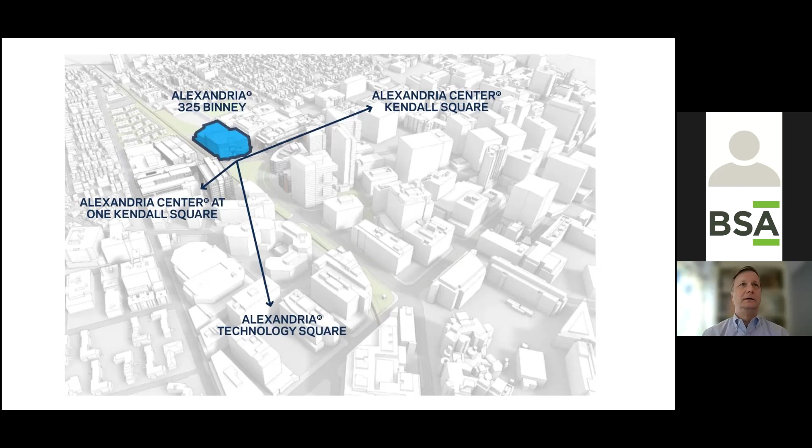One thing we're cognizant of is that our tenants are very demanding - not only do they need high-tech space to perform their research, but they like amenities as well, since they have to compete for their employees. So having a nice structure that functions well is important, as well as being sustainable. We're seeing that sustainability is not just an afterthought anymore - they come in looking for a sustainable building. Everybody wants to make sure they do their part to help with this crisis we're in now.

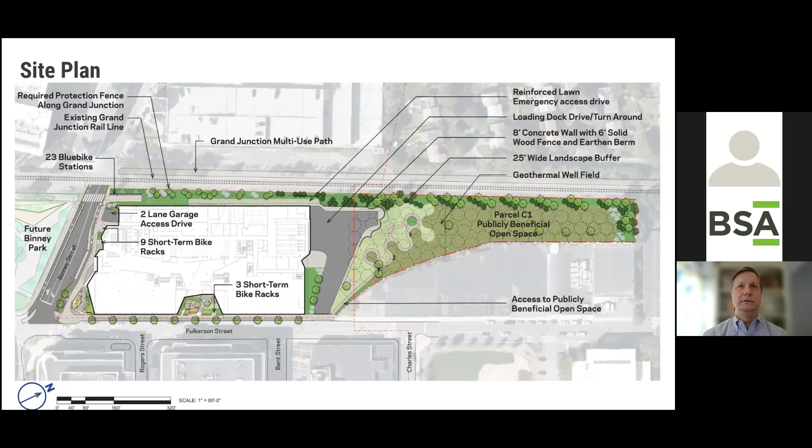So we'll go ahead. Cathy, I'll let you take over from here. Thank you, Rick. Well, as many on this call would agree, an excellent project starts with an excellent client, and Rick and the Alexandria client certainly are that. We enjoy very much working with them on this. They're a challenging client - challenging in a good way - and they challenged us as a design team to do a number of things on this project.

A few things Rick's touched on already. So, we designed a building that would act as a linchpin to the Alexandria buildings in Kendall Square, as Rick had touched on.

Create a building that was a good neighbor to its East Cambridge surrounds and that respected and enhanced its Kendall Square context. Create an efficient floor plan, flexible both lab and office, that took advantage of the density and FAR allowed on the site. Also creating a building that promoted and supported healthy environments, including access to natural light.

And also, certainly not the last challenge, but a big challenge and something that is important, I think, to everyone on the team, is to create one of the most sustainable lab buildings to date.

So one of the main aspects as architects, as we start looking at this, is the building design that supports creating the most sustainable building that we can create is a high performance envelope. So first of all, you'll see the building is not a glass building.

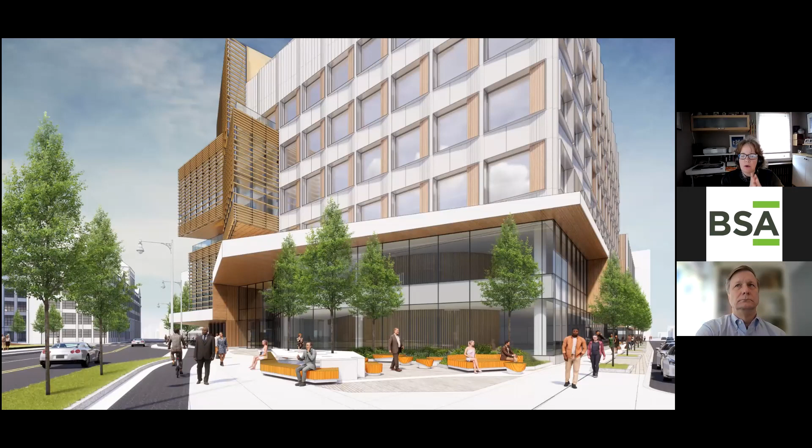We have 6 inches of mineral insulation, and our R value for the opaque wall is R22. I have a lot more metrics, I won't get into it, but we can, if you have questions, I'll answer. The windows are triple glazed, and working with the natural light, they're close to floor to ceiling in height.

Some other metrics, just quickly: 6 stories with an entirely closed penthouse. All the mechanical equipment is within the building. Floor to floor ceiling heights from 14.6 to 16.6. We have 2 levels of garage underneath.

And the floor plate, given the maxing out of the FAR, as you'll see here, we've inserted an atrium, and that helps work in bringing the natural daylight deeper into the floor plate. It also works, as Rick had said, to provide an amenity - not only daylight, but spaces for informal gathering, social gathering, as well as more formal gathering.

Next slide, Jack. So just quickly, our facade overall is just under 35% glazing. And as I said before, it's made up of primarily punched openings. There's the TAKTL panels, as well as metal panels that surround the accent and surround the windows.

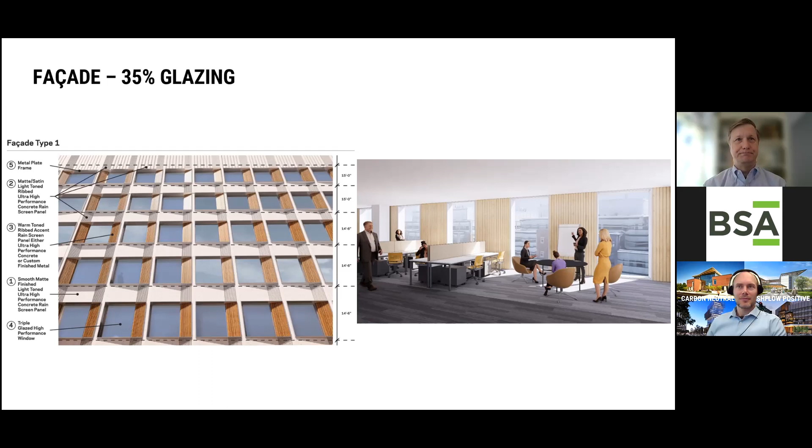So as we approach all our buildings now, it's sort of a 3-step approach: how do we get to carbon neutral and net zero, however you want to frame it. Energy efficiency is the first, obviously. The lower you can get the building's BTU requirements, that gets you off to a great start.

And also, as you'll see later, we're striving to minimize fossil fuel. It would have been great to eliminate it, but because it's a lab building, because we have such high ventilation requirements, we're just not there yet. But this building will use about as little as it possibly can for such a use.

And then when the project's complete, we'll have some solar panels on the roof, and then we will be purchasing offsite renewable energy to offset the remaining power to get us to net zero.

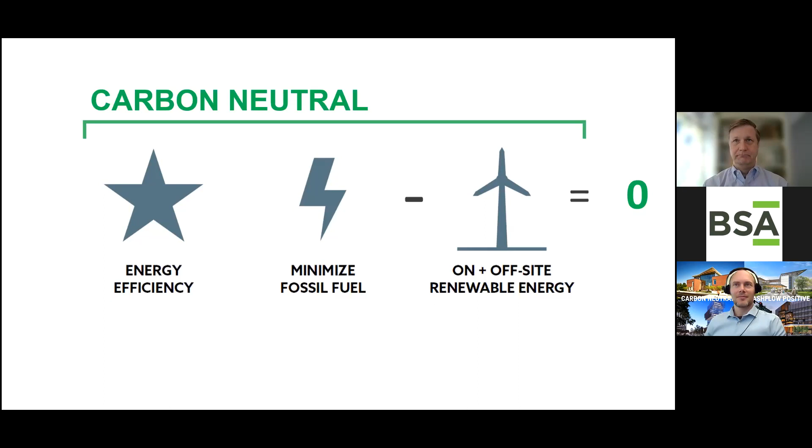So thanks, Rick. We wanted to give a little context here just for the whole audience to think about what's happening in a broader realm beyond the project, and part of why we're all headed in this direction.

So one, obviously the reason ultimately is climate change, but there's also regulatory requirements coming into effect across the country in different states. And Massachusetts now, with the new climate bill that just passed, is going to be one of the leaders in defining a net zero energy code.

Likely by late 2022, the DOER will be promulgating a municipal opt-in net zero stretch code that towns can then opt into and adopt as their net zero standard.

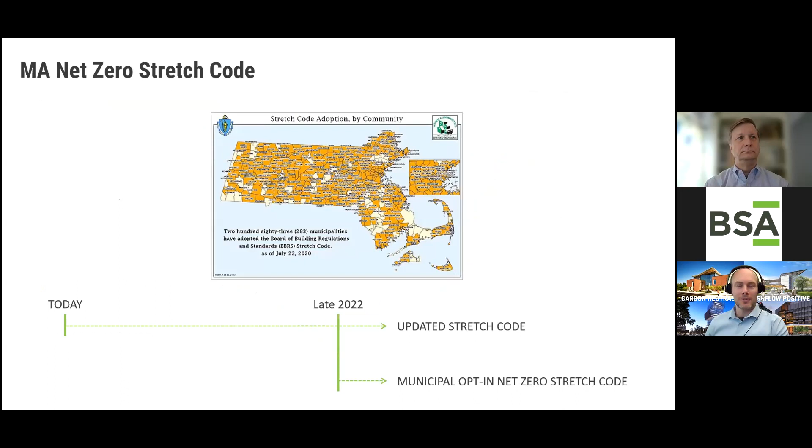In addition to the net zero code, there's also carbon neutral zoning going into effect in different cities and towns. Somerville has already passed theirs, with overlay districts and density bonuses where many buildings being built there must meet fossil fuel free carbon neutral standards. Lab buildings in Somerville get a pass on that to some degree, but still have to meet LEED Platinum.

In Boston, we're working on carbon neutral zoning for the city, which will define limits for building emissions and then mandate that remaining energy consumption be offset, similar to what Rick described, to get to carbon neutral for all new buildings starting in the near future. Cambridge, as Rick mentioned, he's working on as part of their advisory group to help guide them towards carbon neutral standards. And a shout out to Brookline and other towns that have been pioneering a move towards mandating electrification.

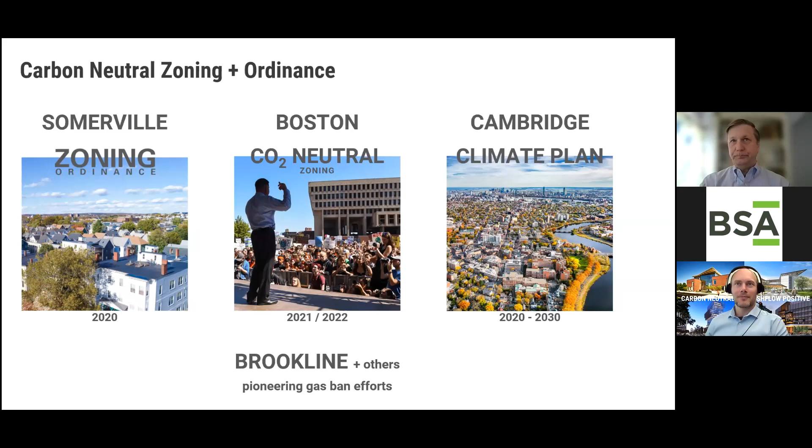In addition to new construction, there's also a move towards regulating existing buildings. Similar to how a new car has to meet a miles per gallon standard, but old cars still have to get inspected and tuned up so they're not polluting too much, same thing with buildings. Looking at the existing building stock, there are many places across the country now requiring not just reporting on energy data, but also a move towards energy reduction.

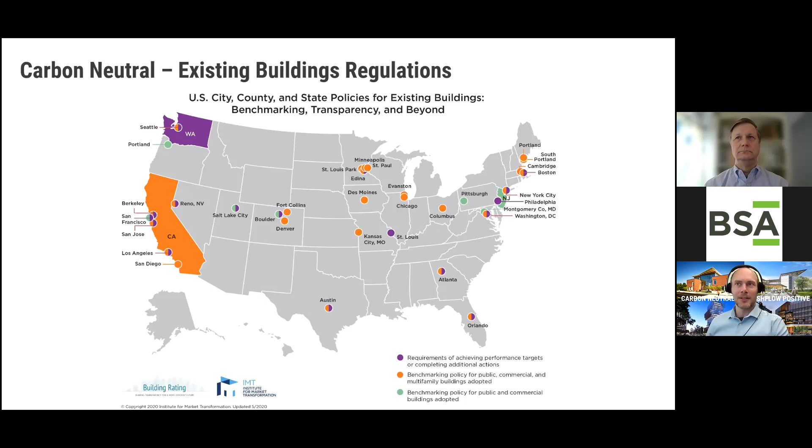New York City was one of the pioneers with Local Law 97, moving towards an 80% reduction in building emissions citywide by 2050. Boston is now following in their footsteps with 100% carbon reduction by 2050, ratcheting down in 5-year increments. In both locations there will be financial impacts and compliance payments to the city if you're not in compliance. So this is a smart investment in the future to be building low carbon buildings, even labs and healthcare, because at some point there will be a financial impact if you're not aligned with those carbon reduction goals. If you build it right today, you'll be smooth sailing in the future.

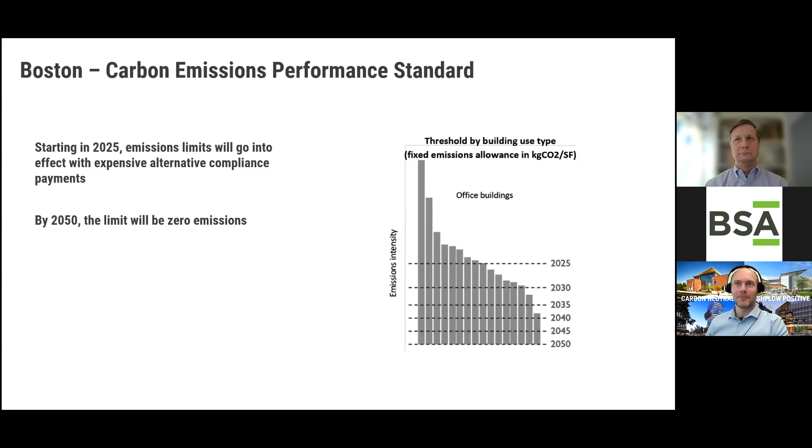Now, why does everybody keep talking about electrification? Sometimes people worry that tying to the grid and running an electric building has a lot of emissions too. And it's true, the electric grid is not carbon neutral yet unless you buy renewable energy to offset your electricity consumption. But if you just plug into the grid, if you plug in a heat pump that's say 300% efficient, you're actually having half as much emissions as if you burned natural gas to heat your building. And that's already based on 2018 data, and emissions for the grid keep coming down.

Not only is a heat pump far lower emissions today than burning fossil fuels, in the future it'll become dramatically lower. The climate bill is another big driver of that—by law we now have to be at 40% renewables on the grid by 2030. And then there's also nuclear. So the grid is not only clean now, but getting cleaner very quickly, which makes it sensible to pursue electrification for buildings rather than burning fossil fuel.

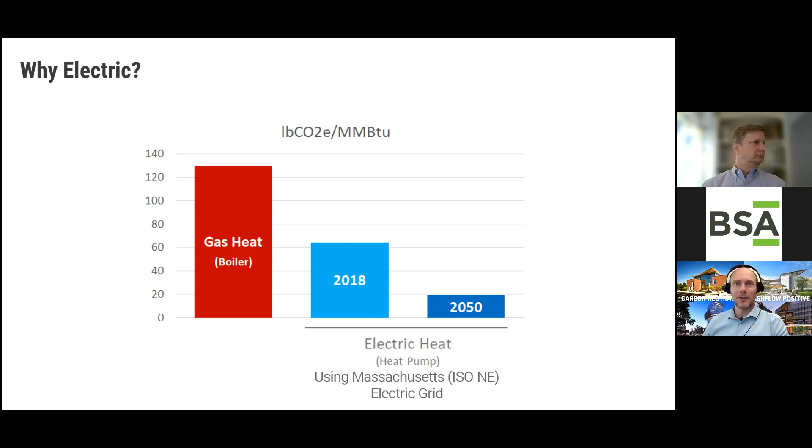As Rick mentioned, labs today are not quite ready in a cold climate like Boston to be 100% electric. You need backup power, peaking heat, and backup heat. All of the net zero and carbon neutral standards we've looked at, whether codes or zoning, recognize this and allow fossil fuel combustion as backup and peaking systems like generators and boilers, particularly for lab buildings—just an absolute necessity.

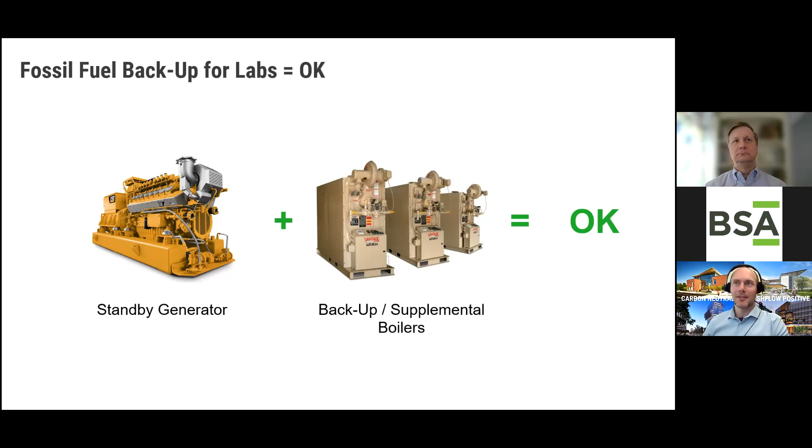As Rick mentioned, we also have geothermal ground source heating and cooling to reduce energy demand, and water reduction measures—three things we're doing there. We have a blue roof system that captures rainwater, condensate capture, and we're also capturing the underslab groundwater, using all of that for both irrigation and cooling tower makeup to reduce overall water use.

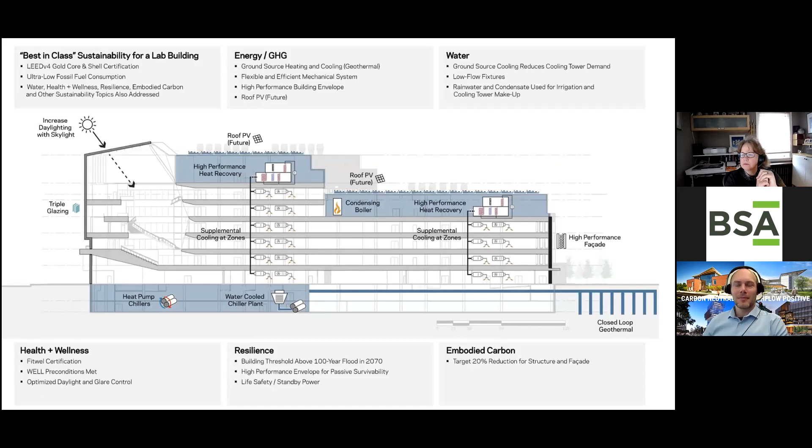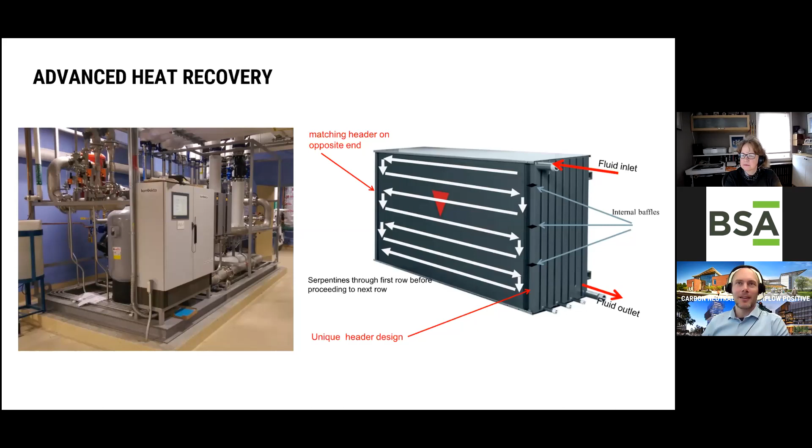So here's the thing that gets me most excited about this project. A lot of you who've worked on labs are probably familiar with the advanced runaround heat recovery system for capturing energy out of the exhaust air and putting it back into the supply air. That's nothing new, many buildings use this technology, but what's really cool is we're taking it to the next level.

Normally, as you can see in this diagram, we have the exhaust air handler exhausting all the air out of the building, and on the bottom the makeup air handler supplying air back into the building, bringing in 100% fresh air. A typical glycol runaround system has one coil in the exhaust and one coil in the supply, circulating water back and forth to transfer the heat energy.

One of the things we're doing to make that more efficient is adding a second coil in the supply air handler that not only provides more surface area for better heat transfer, but also wraps around the cooling coil, which you can see in the center here. So you get free reheat and additional pre-cooling off of that in the summertime.

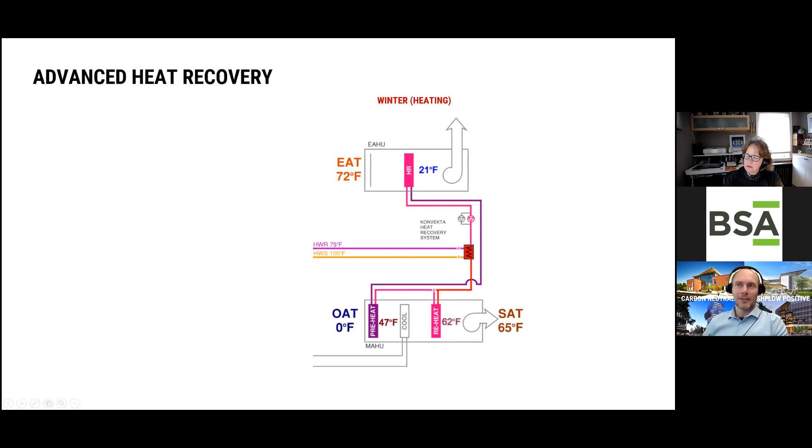But that's just step one. Step two, and this may seem shocking to some, is we are actively going to frost the coil in the exhaust air handler on the coldest days of winter. So not only will we pull out every BTU down to freezing point and stay above freezing, which is what normal exhaust systems do, we're going to actually drop below freezing, allow humidity to condense onto that coil, build up a small layer of frost, grab all those extra BTUs out of the exhaust air, and circulate that heat back into the supply unit.

This is one of the few systems in the world doing this. I'm sure there'll be many more in the near future - we're working on a few now, actually. But this is really one of the first in the US doing this. There are a few in Europe, I think about 12 or 15 at this point.

There's a really critical way of monitoring to make sure you don't build up too much frost, because you could trip the exhaust units on high static. So there's a timing where the coils frost and defrost in a series to maintain a very minimal pressure drop impact and not let the coils fully frost up.

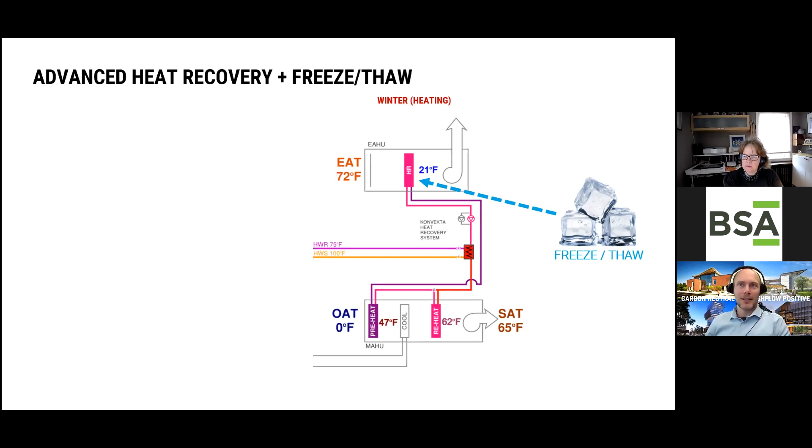That unlocks the potential to use that exhaust as a source of heat beyond what a glycol loop can do, by tying in a heat pump chiller. We're turning that exhaust coil and tying a heat pump chiller to it to essentially make it an air source heat pump. People are probably familiar with mini splits on houses that in wintertime pull heat out of the air from outside and put it into the house to heat it electrically, very efficiently.

Well, this is the 500-pound gorilla lab version of that. As the exhaust air is leaving the building, we're not only going to pull heat down as much as we can passively, but we're going to actively use the heat pump to super cool the fluid going into that coil, pull every last BTU of heat out of that air, and inject that heat back on the supply side. It's basically like a supercharger for the exhaust heat recovery system - really cool innovations combining technology we've used many times in the past, but in a new and innovative way.

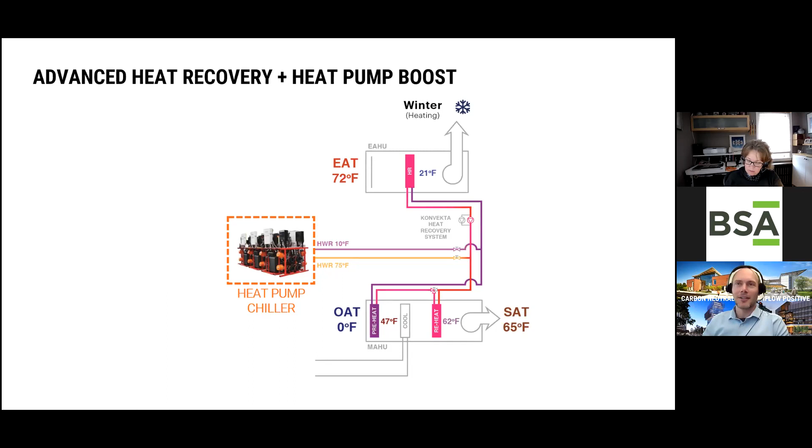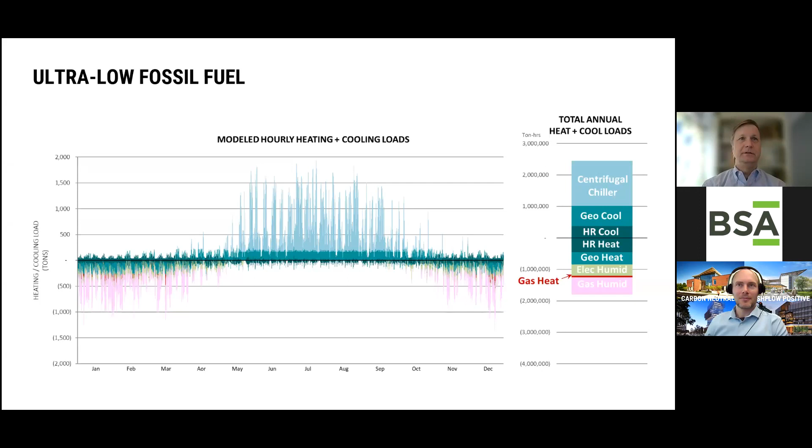That is clearly the product of a great design, everything from the envelope to all the mechanical systems that my colleagues just talked about. We like to say it's the most efficient lab building ever. We certainly know it is in Cambridge, and probably, we're not aware of any building anywhere that houses laboratories and has such a low EUI. That will benefit us for years, not only because we'll be reducing our carbon footprint, but also financially, because the offsets we'll be required to buy are so much lower since the building is so efficient.

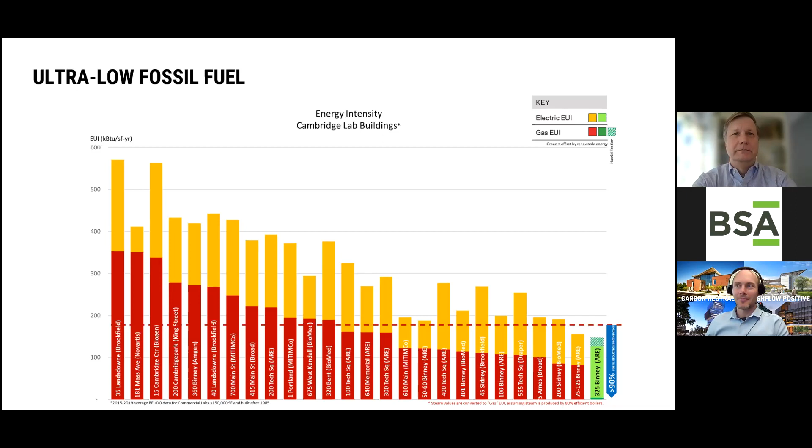And that's, as you can see from these other benchmarked buildings, a dramatic shift. We're in the range of a 90+% reduction in fossil fuel compared to the benchmark. And it's okay to have some fossil fuels as backup and peaking systems. If you can shave off 90 to 95%, then I'd say you've done a pretty incredible job. Yeah, it's simply amazing.

So here we are, end of our presentation. And I have to say, it's a nice looking building too, for all the features we have that we'll be able to offer our tenants and the sustainability we're able to build in. It's a nice looking building too. Thank you to NBBJ for that. I guess, Carol, now we'll open it up to any questions.

Yeah, we already have some questions. The first one was, first of all, wonderful project, astounding project. Jacob, you're going to have to go through that advanced heat recovery a few more times for our whole audience to really understand it, so I'll just put that in as a plug. But one of the questions is, how much are the sustainable design goals for this and other projects driven by the city versus the client or the market? Rick, do you feel like you could answer that? Is that a blend, or Jacob did a nice job of showing it's coming, but for Alexandria, can you explain a little bit why this vision of being an incredibly sustainable company?

Yeah, I think blend is a perfect word for that. We do have corporate goals, we want to get to net zero sooner than required. I think the state and others are looking at 2050 for 100%. We feel we'll be there before then. So it is a blend, we have our own goals in mind, but we also keep close tabs on the municipal and state goals as well.